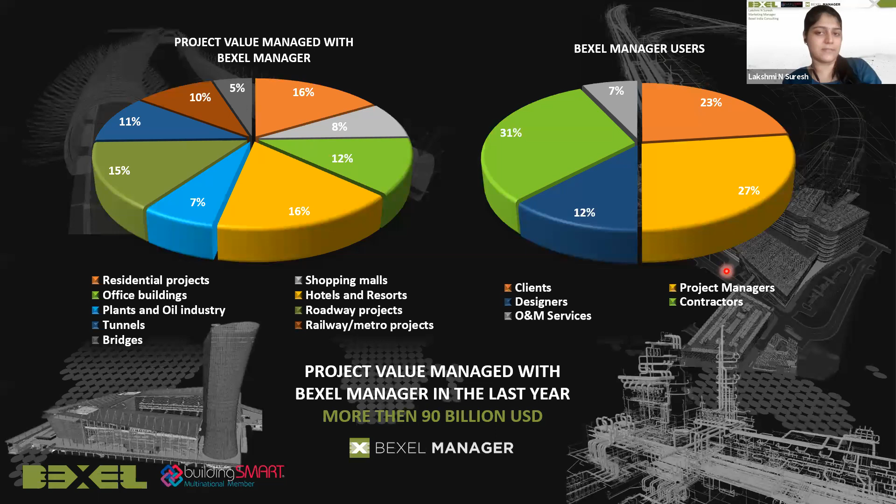So next slide. So there are various project values managed with Bexel Manager in the different sectors in the construction industry. The project value managed with Bexel Manager in the last year itself is more than 90 billion USD. So most of the Bexel Manager users are project managers and contractors. This is just a graphical representation of whom Bexel Manager serves and which industries we cater to, which is basically every industry.

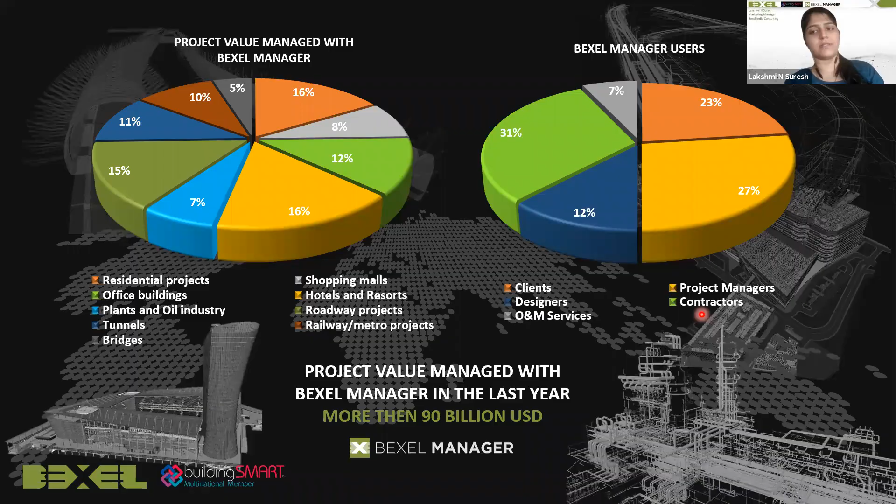So now the question comes, what is the requirement for them of any kind of open BIM standards, and how is it going to help the students? So this is the big question, right? Because you guys are going to be the next generation who's going to work in the disrupted and revolutionized AEC industry. So most of your faculties would also know there's a significant change happening in the industry right now. But the main question is, I'm talking a lot about BIM. So most of you would be thinking, what is BIM? But you might have heard about it also.

It's building information modeling, which is basically a process for creating and managing intelligent 3D models. For example, if you are making a smart city, it takes it from its infancy: how to plan, how to design, construct and operate in an effective manner, to how it looks in the future in a 3D manner before it is constructed. So our product Bexel Manager takes it a step ahead. So that is what we do.

So the current trends in the industry should be an important part of any AEC student's education. And it is crucial to become familiar with the software processes used in today's professional life. So it's going to help a student. It's basically higher chances of getting hired for internships and jobs. It's not only for our company or any other companies out there; the infrastructure and planning ministry is backing new trends in the construction industry. They made it possible for BIM to be used in most of the new metro rail projects.

So BIM is everywhere, but it's still in its youthful stage. But within 5 to 6 years, BIM is going to be a household name in the construction industry. So it helps you produce drawings more efficiently, allows you to access various visualization and analysis tools, easy collaboration in group work, clash detection, and less duplication of work. See, these are the things I can tell you.

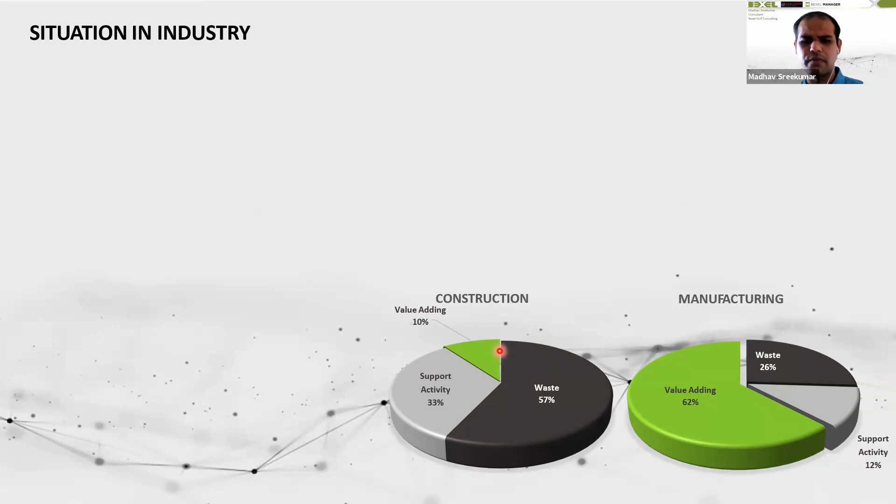There are things like lean construction management that look into taking the good qualities of the manufacturing industry and bringing them into the construction industry. So yeah, the manufacturing industry is always a well-established thing, but what about when we compare with other industries? This is a study by the Bureau of Economic Analysis.

It's US based, and when we compare our construction industry with four other sectors, we find that our industry productivity, the bottom red line, is almost a flat line with slight oscillations around the zero mark, and it has been in decline. Whereas in all other industries, even agriculture, with the implementation of technology, at least we see linear progress, if not somewhat exponential in the case of manufacturing.

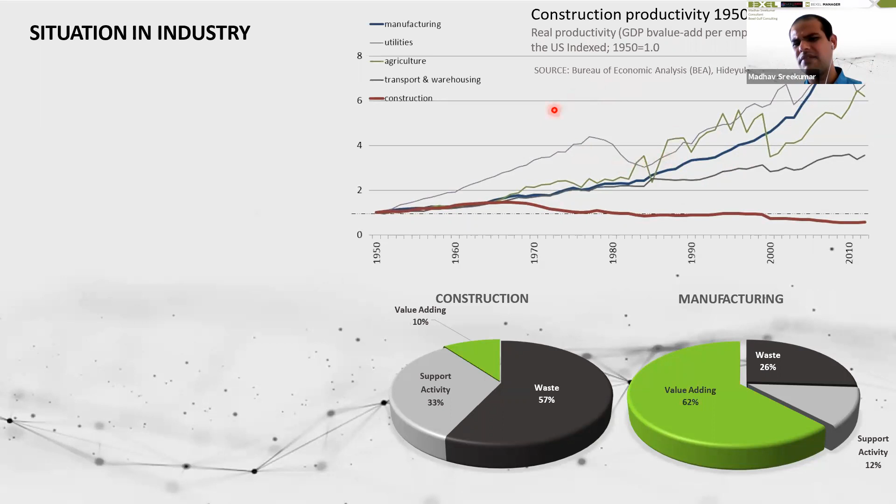The reasons for that are multitude. We cannot say that a single factor is governing the data, and even the data that we see over here is more qualitative, and there are still a lot of debates out there. But the situation, even in the most conservative estimate, is dire.

When we consider construction projects that are completed, about 72% are completed over budget, about 70% are completed behind schedule, and of those, 75% are at least 50% over budget. The point is that when we hit the number 70 or 75, you all would know it is three quarters. That is the struggle which our industry is going through.

And there is an analysis by McKinsey consultants that spans sectors from construction to healthcare. In between, we have banking, aeronautics, aviation, hospitality, different sectors. The least profitable industry is the construction industry. And why? Even though business is run primarily on profitability, in spite of such hurdles, construction is still a thriving industry because it is actually a basic necessity.

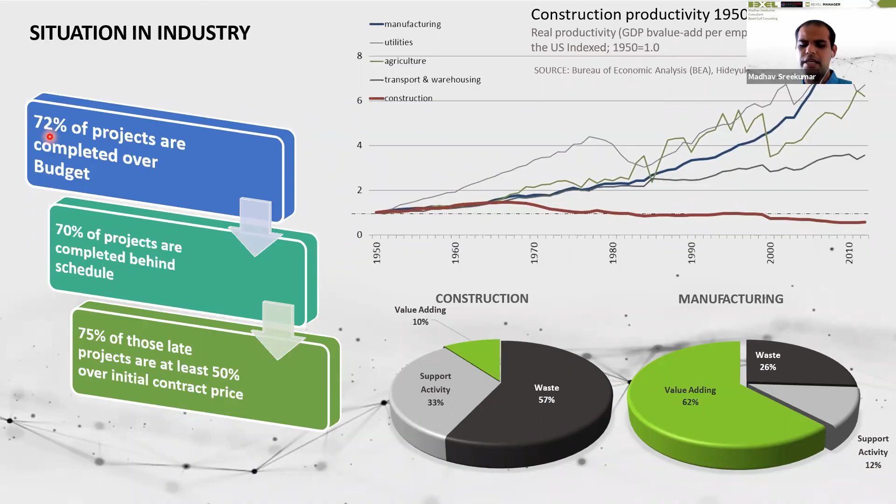However economical or uneconomical things tend to be, we have no other option but to keep the construction industry always on the move, calling for efforts to make things better. And one of those efforts led us to the direction Lakshmi was talking about: using the compounding effect of digital technology to integrate and better handle the data in our industry.

So before I move on to BIM, I want to show one particular case study. This is, of course, one of the most recognizable building projects ever developed. Anyone, even without a basic understanding of civil or architectural engineering, would identify the famous Sydney Opera House. And I have titled it as a project failure. Before jumping to conclusions, I'm talking about the Sydney Opera House construction project and how it is a failure in a strict project management sense.

I don't mean it is not a beautiful building, or that it hasn't created a lot of revenue. What I mean is that it was a project done close to five decades back, and the initial cost and final cost are very different, almost a 15 times factor in the actual cost of construction. Translating into the current scenario, if such a building cost about $1 billion to complete, I may be exaggerating, but think about it, and finally ended up at $15 billion, investors would run out. It would be a really messy situation.

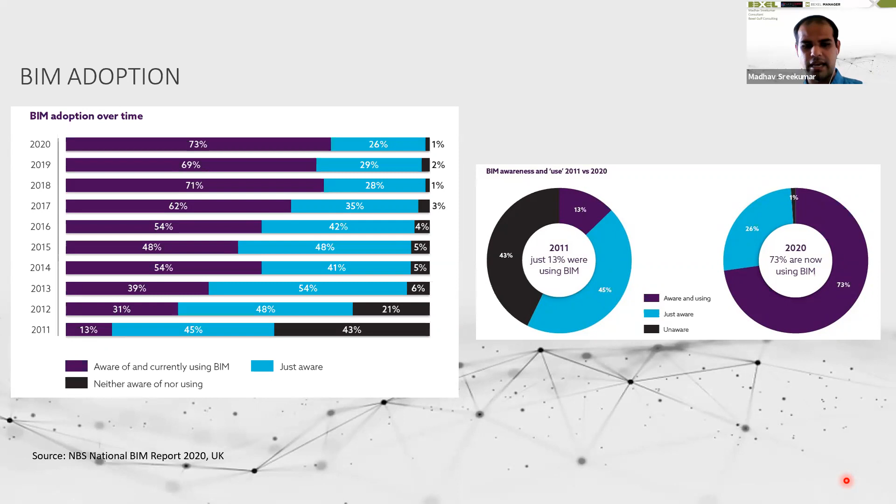Data-driven construction is currently being focused on by all, even the Indian government: the metros, the smart cities. In Maharashtra, for one project, I recently became aware that around 100 crore was set aside only for digitally handling the project management part. That is how big the situation is getting, and that easily translates to jobs for skilled people, and you can become the torchbearers of such progress.

Finally, we are essentially talking about how to tackle the inefficiencies. A key term, open BIM, becomes very essential. Why? Because we have data, and that data can be used by three separate software packages. The building life cycle is around 50 years. After 48 years, somebody comes to look at how to maintain the building, and he or she is restricted: you have this information, but you need to choose a particular software that is probably not ideal for the activities he or she wants to do.

It is kind of restrictive. The easiest analogy I like is that, just as a PDF is openable by any PDF reader, we need certain open formats of BIM, so that the data that is generated and created in a meaningful sense can be used throughout the life cycle of the building.

And considering that even the smallest individual house has a lifespan of more than 50 years, open data has become very important. These are some of the things that we need to be aware of as we come to a close. These are the broad guidelines that everyone needs to set in mind before we delve into the specifics of BIM and the specifics of Bexel Manager.

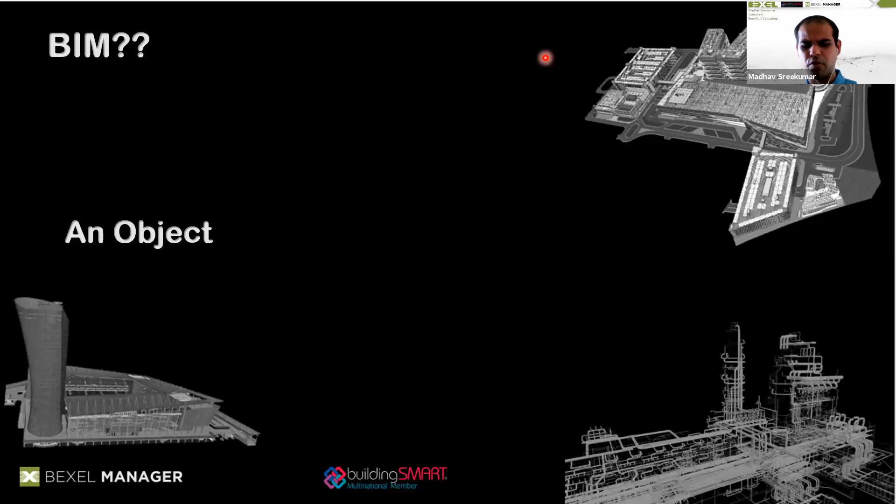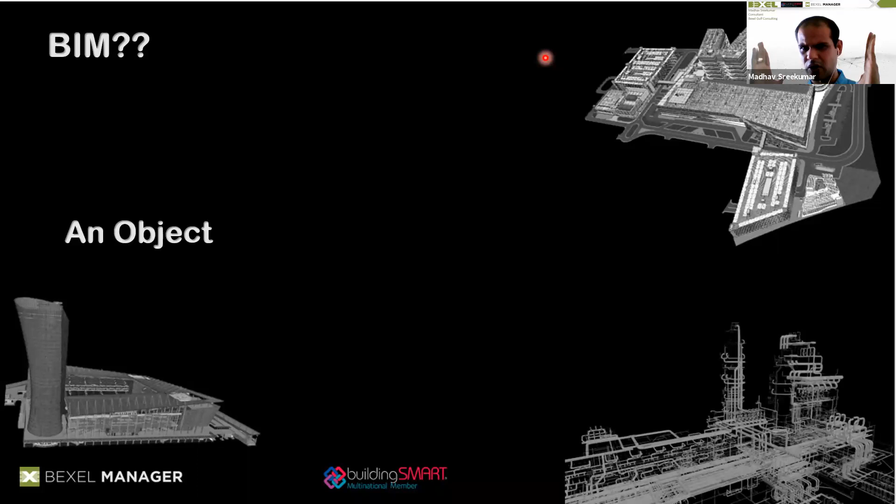So in BIM, we have something called an object. Imagine a building; any component of that building can be described as an object. So a door or a beam is an object, and you can list more, I am sure. Essentially, when you're trying to draw a 2D CAD drawing, when you're trying to translate some thought process onto paper, you are trying to define this object. And in BIM, we are trying to digitally represent this object and manage the information that we are representing with this object.

And 2D CAD that we draw, either using a CAD authoring tool or even pencil and paper, essentially does the same thing, but it has various levels attached to it. Okay, and the information that we spoke about here can be classified into two types. Any object will have geometric information and functional information attached to it. So again, we tried to make things simple and ended up with object, geometric and functional info. So let's look at what exactly geometrical information is.

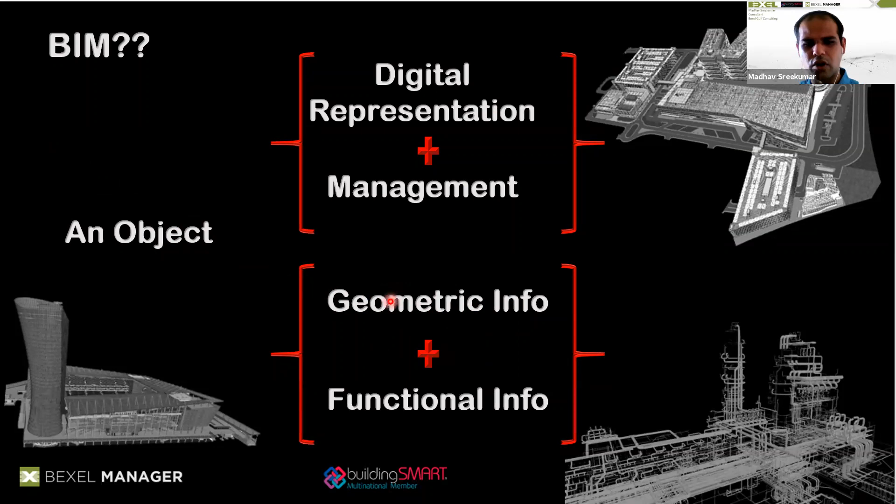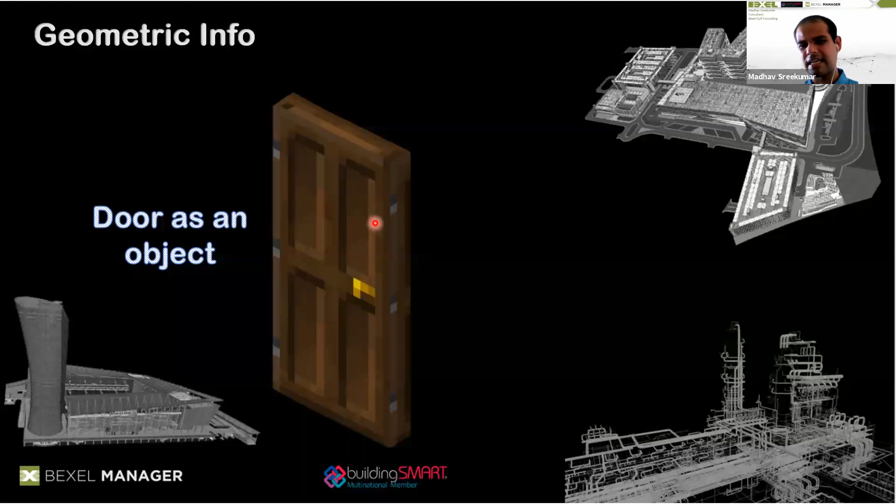For that purpose, I'm using the simple door that we use in our buildings as a reference object. So what are the geometrical informations attached to this object? A door definitely has a height, width, thickness, and a swing. And all these things, if you take one second to imagine the 2D drawings that you have produced, are captured in the 2D drawings in plan and section.

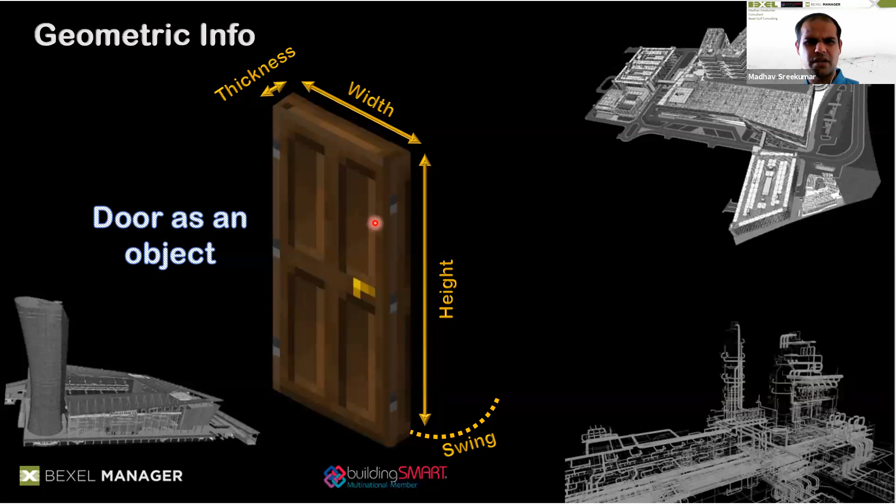And is this enough? This level of information, is it enough for a person at the construction site to completely build this particular object, that is, the door? Is there any other information related to this door that a person would need? That question leads us to the next type of information associated with the object, that is, the functional information.

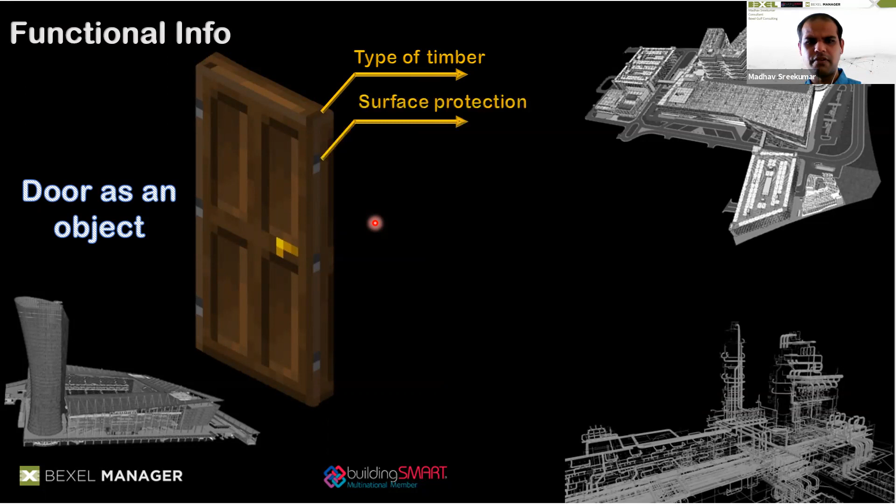For a door, some examples, not exhaustive, would be: what material is the door made of? Is it timber or steel? What is the surface protection, like varnish or paint or bitumen coating? What exactly is the fire rating that is needed? What is the make of the door handle, or do we need a specification? It needs to have a certain level of security, a twin cylinder, some particular locking mechanism. That kind of thing.

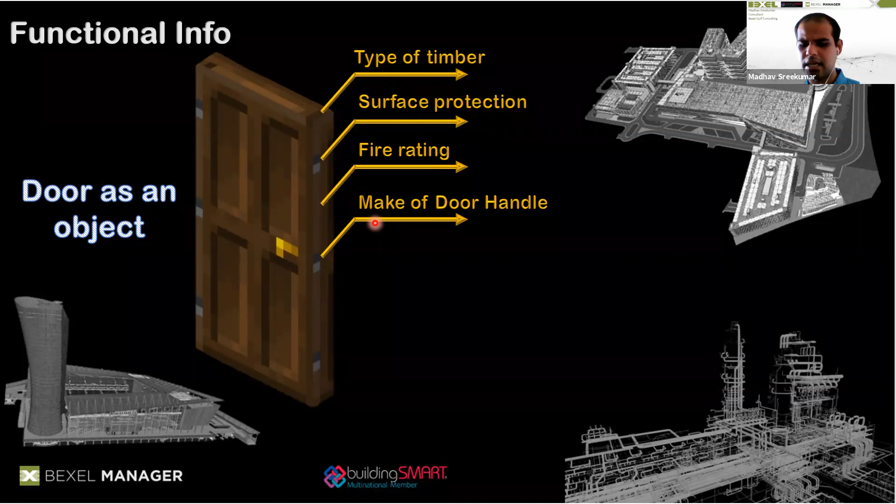The material cost is actually needed. When the client asks how much money they would end up paying, we as consultants or contractors would need to have an answer with minimum variation involved. And the labor requirements: what exactly is the number of people required? Is there a particular kind of tool required to handle and install this door at site? All those things need to be looked into.

And finally, imagine that the door is constructed at site. As I said, the door is probably going to be used for a lifespan of 50 years. What is the maintenance cycle? Do we need to revisit every 2 years or 10 years to check whether the quality is good?

What exactly is the maintenance that needs to be done, or quality checks that need to be carried out? So you see, all these functional informations are also attached to the same object, and with BIM we are making sure that the geometric and functional information is coming together in a meaningful manner that can be used across the life cycle of the product.

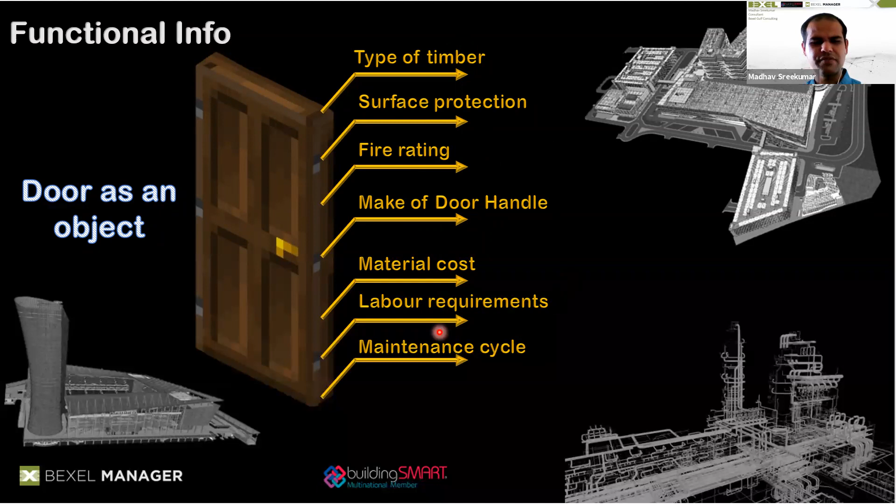So that last part, across the life cycle of the product, let's look into the information that we saw previously. In the previous slide, we saw around 7 functional infos. Are all these informations made at one single go? Probably no. The answer is no. And to understand that, let's look at these 7 functional informations from the life cycle of a project perspective.

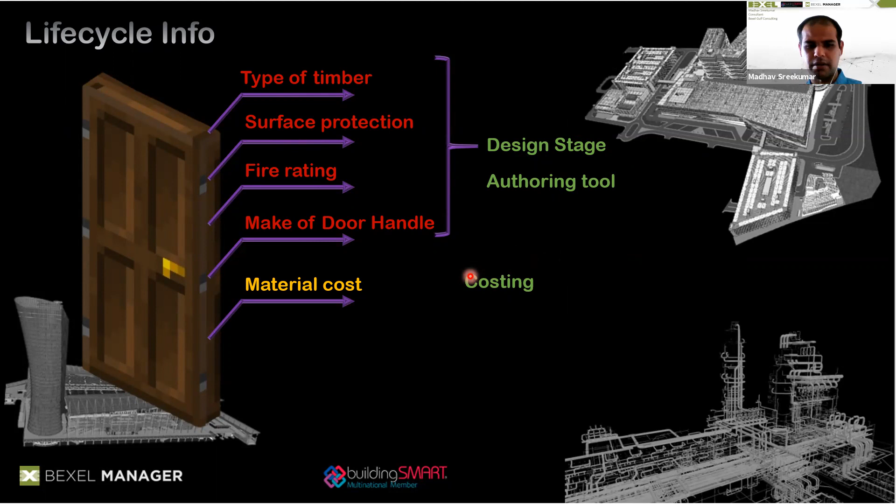And these 4 information, if you can see, the timber, the surface protection, all would probably be decided at the design stage by an architect. The material cost would be carried out by a costing consultant, but that's a separate person and a separate part of the life cycle that material cost comes into play. When we come into the labor requirements or the time involved or all the sequencing activities, a planning engineer would be involved for this same door. And when we talk about the maintenance cycle, it's clearly a post-construction activity.

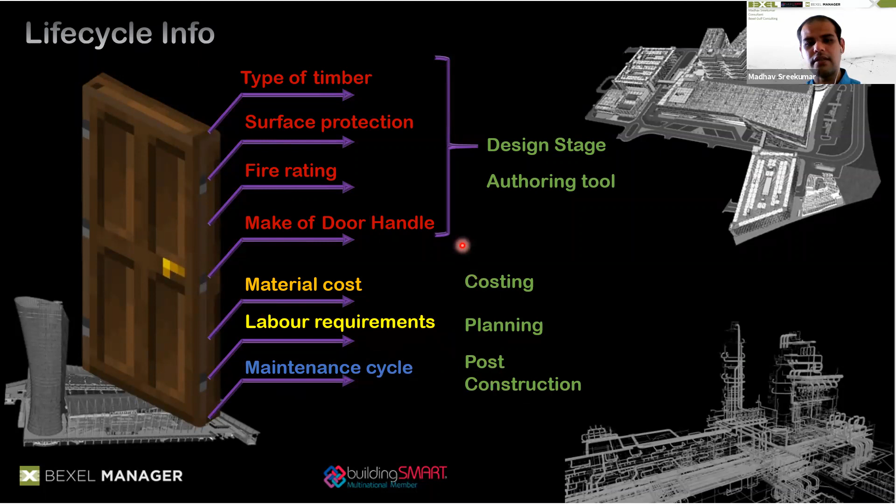So even within this information, you see that many information is added at later stages at different points in the life cycle of the project. And that's where we come in. We as Bexel Manager want to have a proper integrated software platform where all the BIM management cutting across all the life cycles can be managed. And hence, when we talk about Bexel Manager, we add one more word before the BIM management tool, that is the word integrated. And that word we will keep on repeating throughout this webinar.

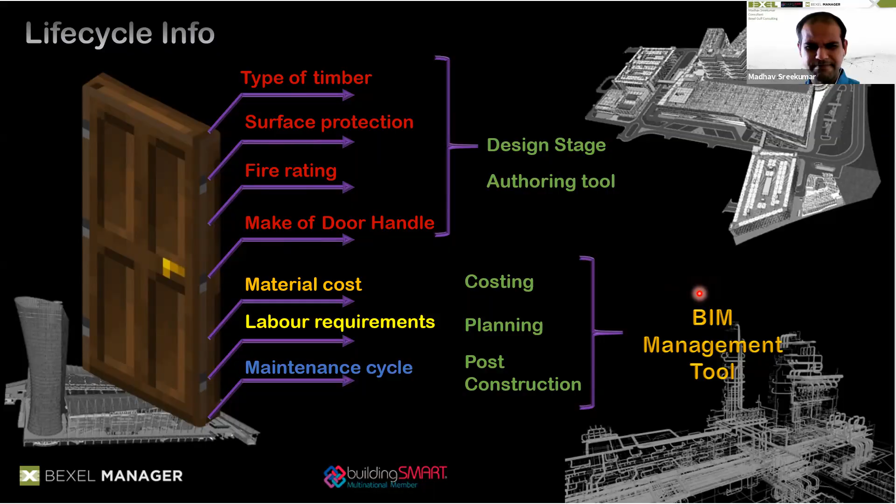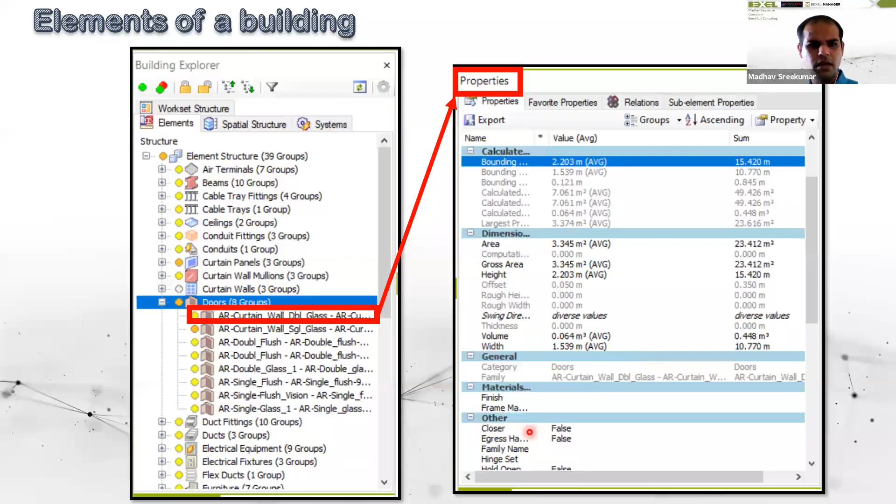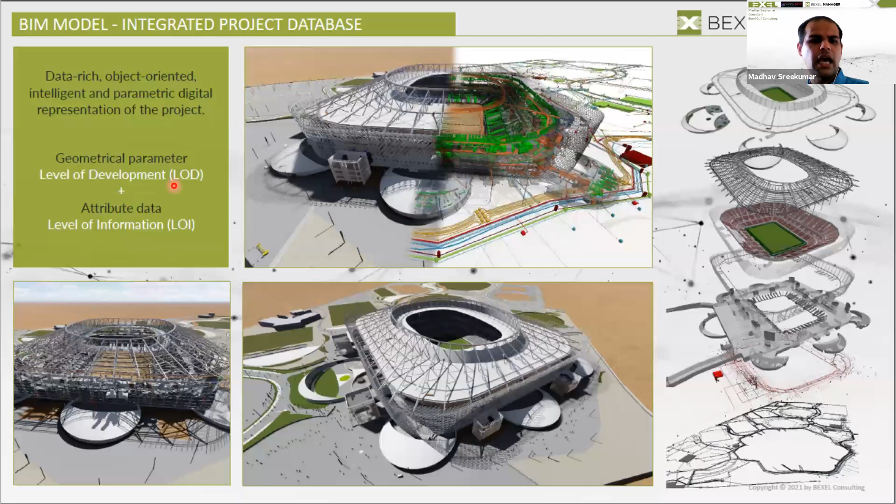So imagine this, for those who have studied structural engineering, you would be setting, okay, the load can be taken, a minimum standard or minimum strength is set, or minimum requirement is set. Something similar is set with the level of development and the level of information. We are at the start of the project saying that when you are developing the information, we need so much of the information in such a manner. So this is an initial expectation of how the project should take shape, and these together bring out the complete BIM model.

Yeah, and when we're talking about BIM, another concept or term that we commonly see is the federated BIM model, and that is nothing but you have different teams working. When we are strictly in the design sense of a building or an infrastructure, we have different teams working together to build this building. For example, the structural team would be responsible for developing the structural elements. The architectural team would be responsible for the facade and all the spaces aspect of the same building.

And the MEP team, the mechanical, electrical, and plumbing team, would be responsible for developing models related to the same building. And all these three separate teams' information should fit together to form one single model that can be taken apart, put together, and dissected to create meaningful information. So that single source of information, using different information from different teams, when it comes together, is called a federated model in BIM. So try remembering this term when we are continuing with the discussion about BIM.

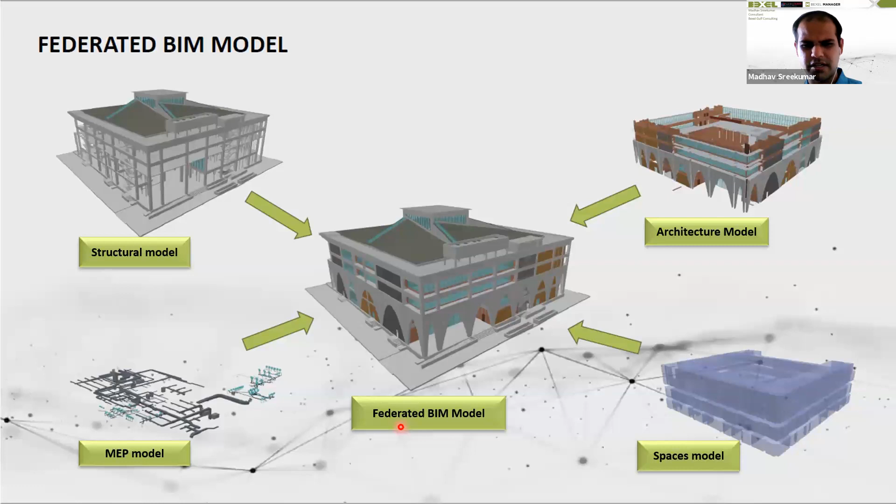And this sums up a talk about what exactly BIM is. So to recap, until now we have talked about why BIM is required and what BIM is. Now let's see how Bexel Manager is very efficient, and why we keep getting recognition in the BIM software platform because of our integrated BIM management tool. So that is the section we are starting on from now onwards.

One of the advantages of Bexel Manager, why we are very robust in the automation aspect of things, is that we have the ability to create different templates. The exact meaning of these terms would be irrelevant at this stage of understanding. What templates mean is that, for example, I own a construction firm that builds private villas or individual townhouses. So the kind of construction that I carry out is very similar. Shifting from one project to another, the kind of information that I would be handling is also very similar. So once I set up for one project, a lot of things can be reused.

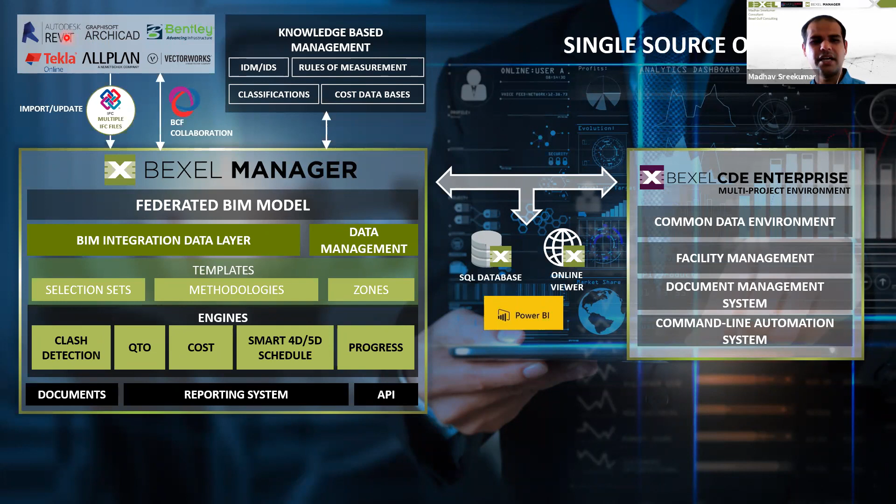That's not just it. When you start working on the BIM processes, you will see a plethora of softwares that are available, starting with the most famous, Autodesk Revit, and Bentley, Tekla are all the major players of the different segments of the BIM processes.

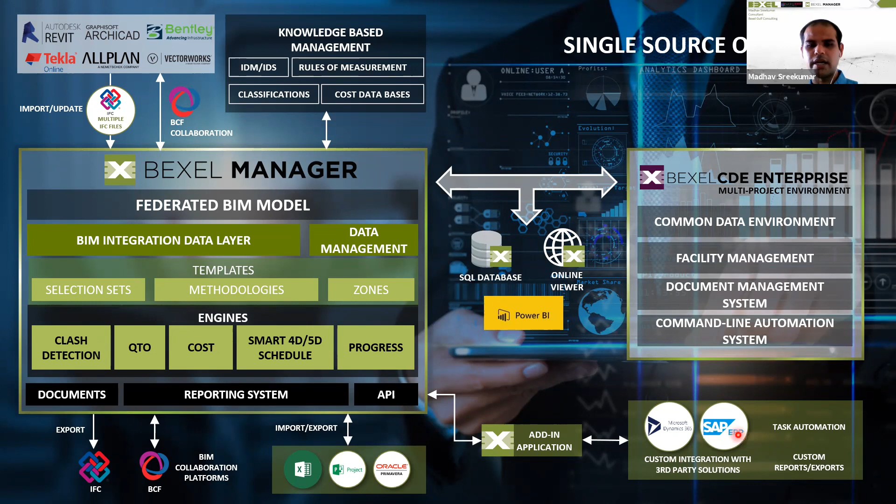And all the information we spoke about till now is BIM, and we are operating in a construction industry that is severely non-BIM, and hence the need for us to communicate, export, and import data from non-BIM softwares like Oracle Primavera, MS Project, and Excel, which we are also able to handle very robustly. And finally, customization for client requirements is also another thing that Bexel Manager is able to handle. For example, SAP ERP kind of customization, if required, can be handled using add-ins.

Now coming to the BIM lifecycle, we say that Bexel Manager has visibility or capability to handle information in all the BIM lifecycles of the project. So the different BIM lifecycles are 3D BIM, which involves clash detection, visualization, and quantity takeoff. When coming to integrated 4D, what we mean by integrated approach here specifically is that we have two things, time and cost. So costing comes in the BOQ or the costing line items, and the schedule comes in the time part. And one is dependent on the other.

So the costing person who decides that instead of one resource, he will implement 5 resources to handle the same task, it will have a direct impact on the schedule. And similarly, the schedule person who decides that instead of 5 days, he will be stretching this activity to 10 days, will have an impact on the cost. Hence, the importance of integrated BIM. And here, we get to communicate between the cost and time aspects, track the progress, check the planned versus actual analysis, and finally the reporting.

And that's not just it. Till here, let's say, is the finishing of the activities. Once all the construction activities end, then facility management and all other things come into play, and that is handled by our CDE environment. And these two aspects, 3D and 4D BIM, would be the primary focus of what we are discussing here today.

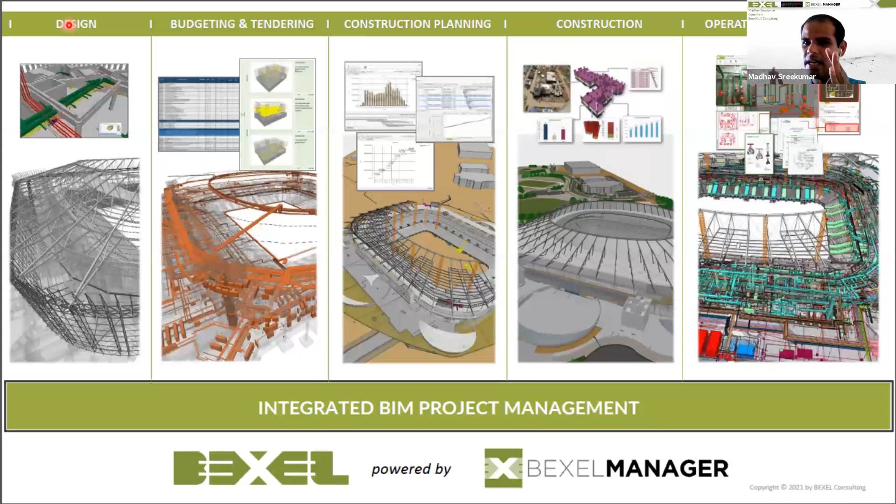So I keep talking about 3D BIM, 4D BIM, 5D BIM, 6D BIM, but all in the construction industry are very familiar with some other terms. In the project management sense, we do not use the term 3D BIM. We use something like design, budgeting and tendering. We use construction planning, construction, and operation and maintenance. And when we are doing the same processes using BIM, we use the terms 3D BIM, 4D BIM, 5D BIM, and 6D BIM. So it's not complementary things. It's the same process having two different names because of two different approaches.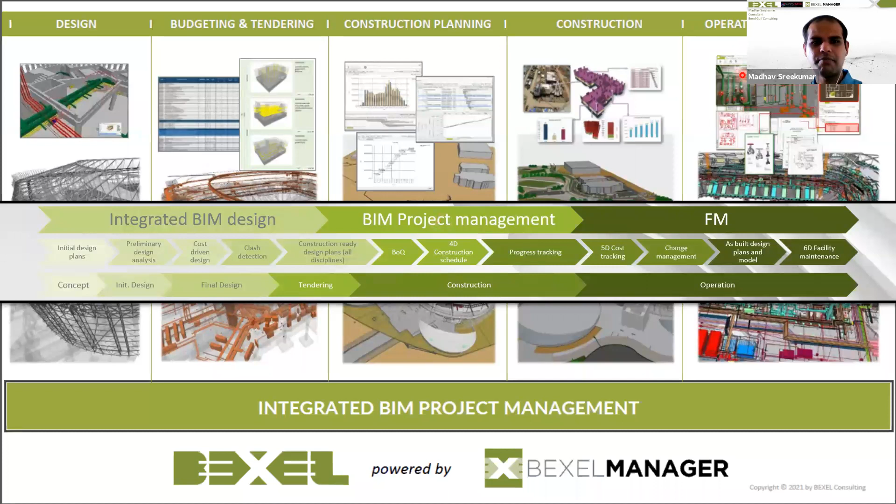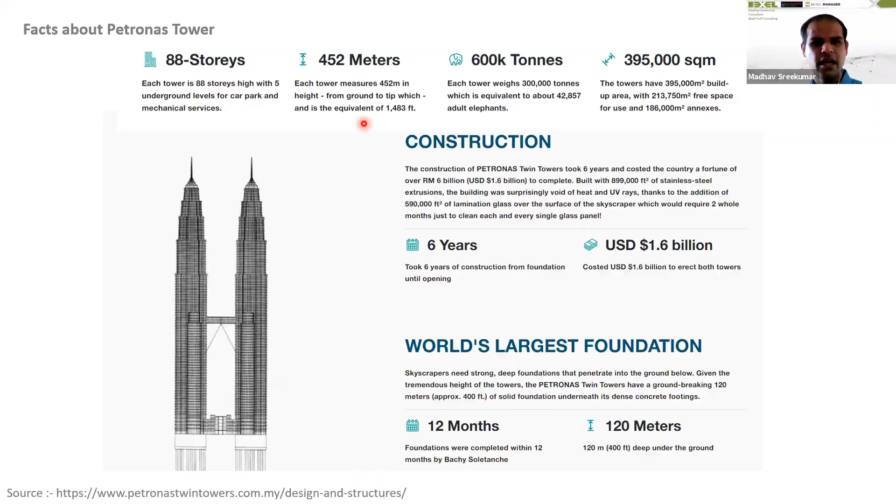And a quick break from Bexel Manager to see some brilliant construction. The Petronas Tower is what I would like you guys to keep in the back of your mind when we are talking about the complexity of the construction, the complexity of the information. Around 1.6 billion USD was shelled into building this project, and it has 88 stories, and the kind of information that needs to be handled is very high and busy. And using our Bexel Manager, we have something called steps of progress, or what we call a workflow.

We start with the input. As I said earlier, we have something called the 3D BIM data, generated in an authoring tool such as Revit, as the input for us. We start with the geometry. We get an input. What do we do first? We see whether it is like we wanted it. We check whether there is any error. We do all the verifications, and we finally either make some changes, or we say that the quality check is good enough, we can go for the next step.

For the next step, we start with creating and fine tuning of the cost. Then there is something called cost version, which is essentially a budget. And from there, we have methodology and zones for creating an automated smart planning schedule. Automated schedule creation is the final step. The intermediate steps will not be intuitively clear to you, so I will be explaining all the intermediate steps in detail.

So what should be clear at this stage is that we have something called input, and we would be verifying it and checking the quality of that information using Bexel Manager, and finally ending up with automated scheduling that utilizes the efficiency of our software.

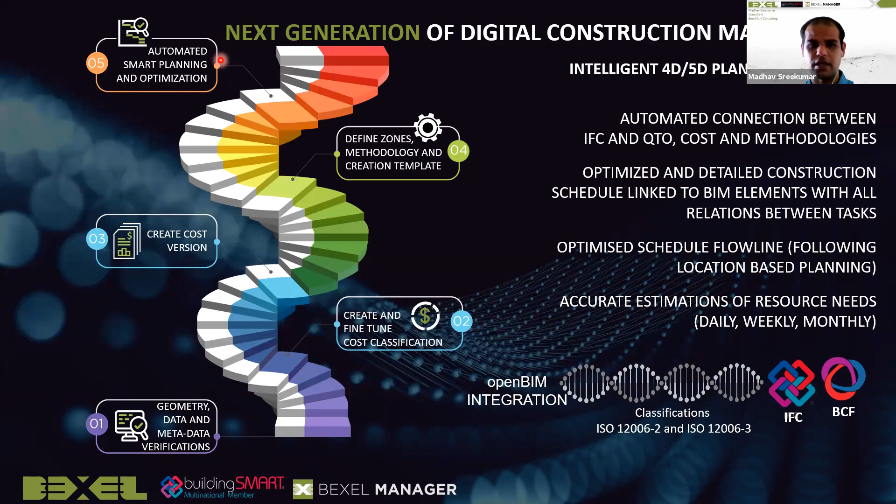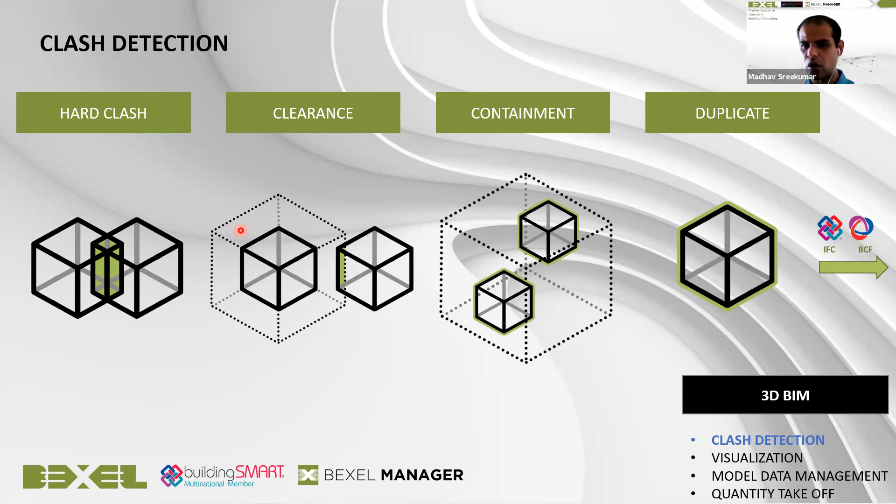So if the clearance between the beam and the duct is less than 50 mm, that would be a construction clash, and tackling it at site would be difficult. Using our software, we run checks on the rule we set, the 50 mm clearance between two specific elements, and check whether this rule is violated anywhere in the project. We understand violations of rules in this manner, and we solve them before we start constructing. That translates to a lot of financial saving.

It's studied that one conflict at a construction site is equivalent to a large amount of money. On a $1 billion project, 75,000 rupees might not be a big deal. But at site we are usually dealing with thousands of clashes, so this value gets multiplied, and hence clash detection and ensuring the quality of the product becomes important.

These are some of the clashes we have detected in projects using our software. Here, this red element is a beam, and the green duct passing through it is a clear clash, which we can ask to be resolved at different stages. Similarly, a few other clashes are represented here. So basically, clash detection represents geometric information validation.

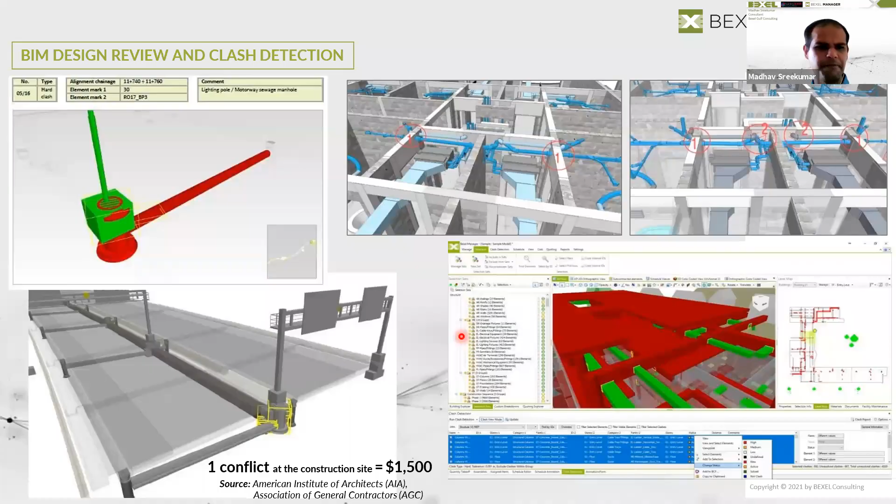Let's say we found all these clashes and made sure they are resolved. We are now sure that the geometric information in the BIM models is correct, the quality is passable, and we can start constructing on site. But BIM has two components: not just the geometric, the functional information is also there, which we handle by data validation. For data validation, again, the input is the BIM model. Our technical team has pre-developed many API scripts that are customizable to our requirements, and these scripts essentially set a checklist, for example, that a beam should have certain information.

And basically, once we run this input through this script, we get that, okay, it is possible. It has got so many warnings. It has got so many errors that need critical resolving, and things like that are generated. Essentially, the functional information quality check is handled using our data validation.

Now, say we have validated and found that 10 errors are there. We have also developed scripts that are again customizable to enrich our model and make sure that the errors that are coming in the data function can be addressed, and not just the geometric information, the functional information is also at the level which can make meaningful sense on the construction site.

So this is what we talk about. We have the geometric information, we have the functional information, and how the quality checks are done for both of these is essentially what these topics of data enrichment deal with. So essentially, when we are saying we are done with the data enrichment, we are saying that, okay, the quality check is all done. Now we get to use the information input, and we can start managing it.

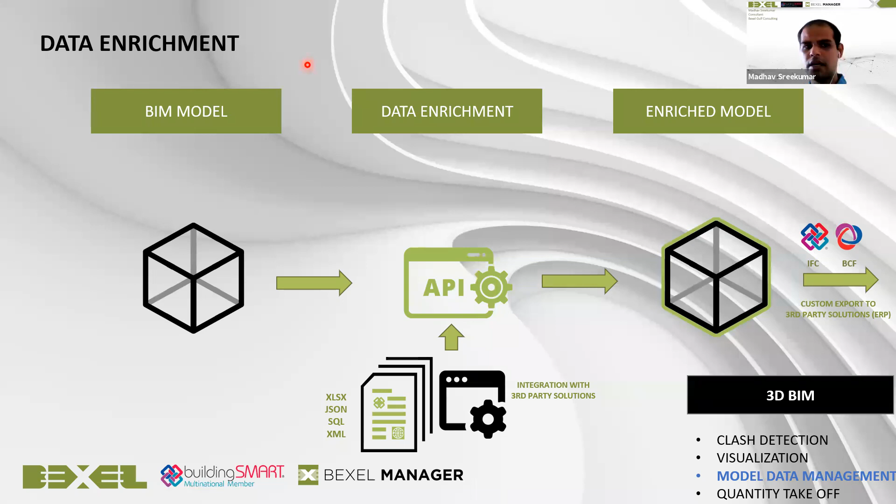The first thing that we would do is a quantity takeoff. Anyone who has done the basic paper on quantity and estimation, it's basically a manual calculation of the volume and/or a surface area or something else. You need to calculate for each and every component of the building, and what we say is that it is actually reinventing the wheel or repetition of information. We already have got a 3D model. We are wasting our time and energy if we have to recalculate the information.

So instead of manually calculating the quantities, what we do is that within this breakdown, we say that of all the elements, around 10,000 elements available in the particular project, I want those elements to be categorized based on some formula, category and family. These are terms that are very commonly used. And of that, I want the quantities, the volume, the area, length, reinforcement, all these things that are already associated with the 3D model.

I want that information presented, and this is exactly something that used to take months for a complicated project. We are able to define it very easily using this logic. And this is actually a very good value addition to the way we function. And when we are talking about creating alternate workflows to make things more efficient, this is exactly what we talk about. So another key area that we can handle at the 3D BIM level is quantity takeoff.

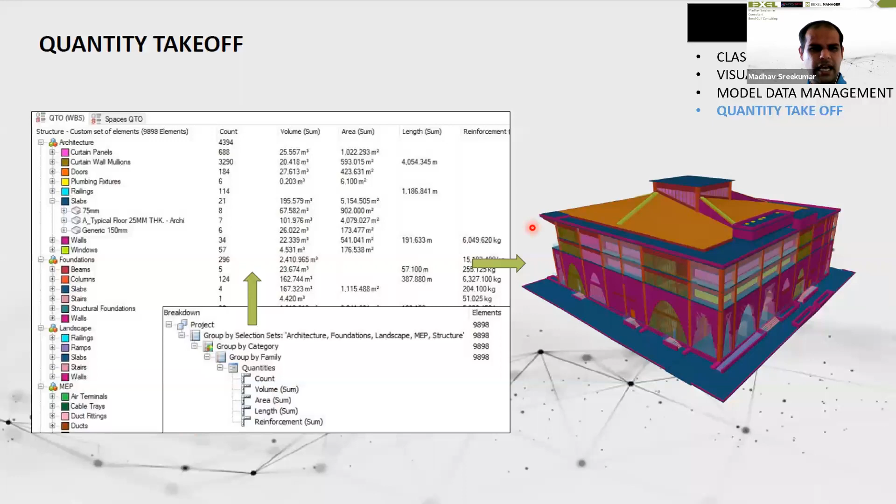And now we are starting with something else, like the cost management. And so we have the quality check done, we have the values done. Now we have the cost management system, which can be done in two manners. One is this starting point. Another is the alternate starting point I am trying to show. What exactly is it? Let's look at it in a deeper manner.

So the first starting point is, in the previous slide we talked about quantity takeoff, right? The quantity takeoff that we have created, we can use this and automatically create cost classifications. So we have the quantity, what is the cost attached to it? So based on that we can automatically create, and we can use our expertise to fine tune this cost to create meaningful cost versions. So over here we already have a cost version which can be translated to integrated cost data. So this is one process.

Another process is we have got many international standards available, like Uniformat, Master Format, or DIN. DIN is based on German construction practices. Uniformat or Master Format is used for Canadian, and so different countries have got different standardized practices, and using such standardized practices, we can get them into our Bexel Manager, either through API scripts or using Excel spreadsheets, and finally fine tune such inputs to create an integrated model of cost data.

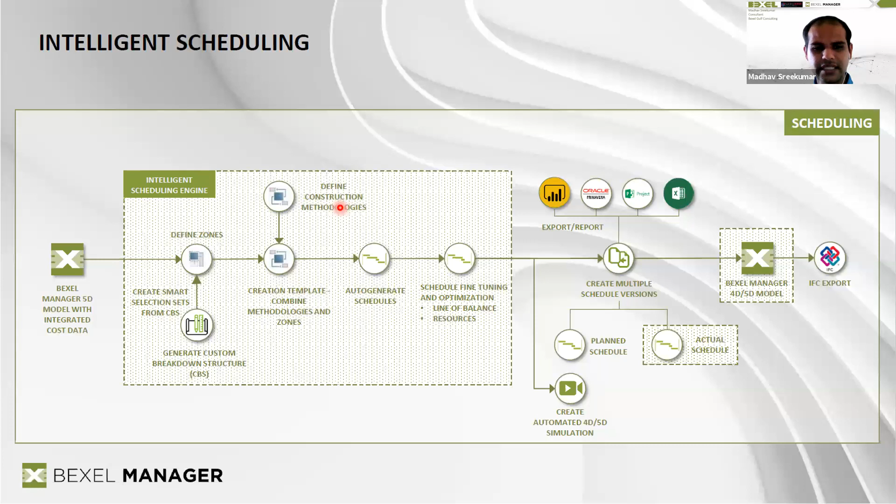So I want everyone's attention on two aspects, two words: define zone and define construction methodology. If we understand these two things, we will understand how Bexel Manager is able to create an intelligent schedule. So first is zone, second is methodology. Zone is a spatial representation or spatial organization of the project. For example, a building that has 11 stories, with first story, second story, third story, fourth story, is a spatial arrangement of data.

And when we describe a zone as second coming after first, third coming after second, the Bexel Manager software will understand that this is the way in which the vertical information is stacked, and we will avoid the error of 5 coming after 6, or some error can be handled in this manner.

Another spatial information is the horizontal one, like the buildings being constructed in phases, phase 1, phase 2, phase 3. Another way is building 1 and building 2, like we have two buildings. After completion of building 1, construction works on building 2 need to start. So such precedence in the horizontal information of project organization is handled using the term zones.

Then we talk about methodology, or what we mean is the work sequence definition. So what is a work sequence? In this building, we can say that first it would be the piles, then comes the pile cap, then there will be the slab, then the tie beams associated with the pile cap, and then we have the columns, walls, and that's how one particular work sequence goes on.

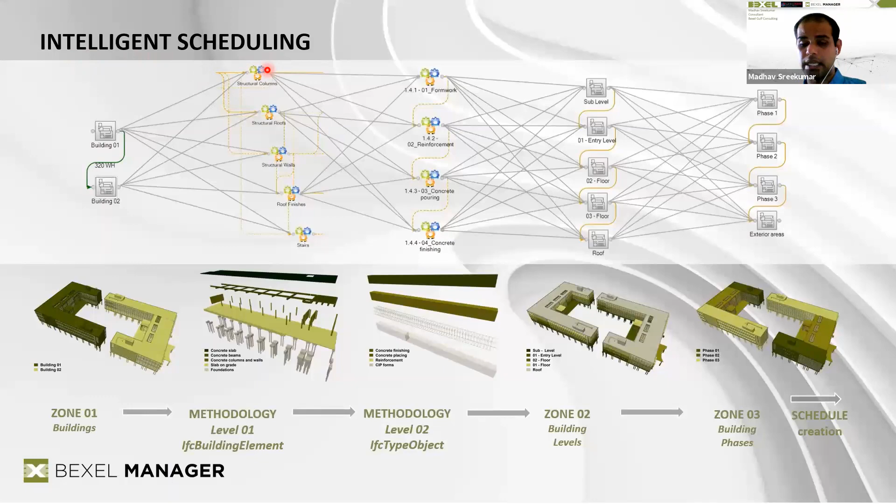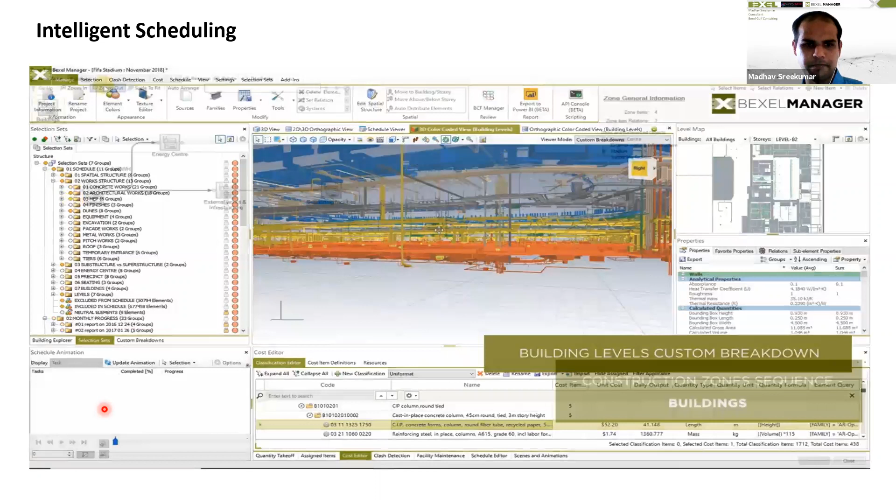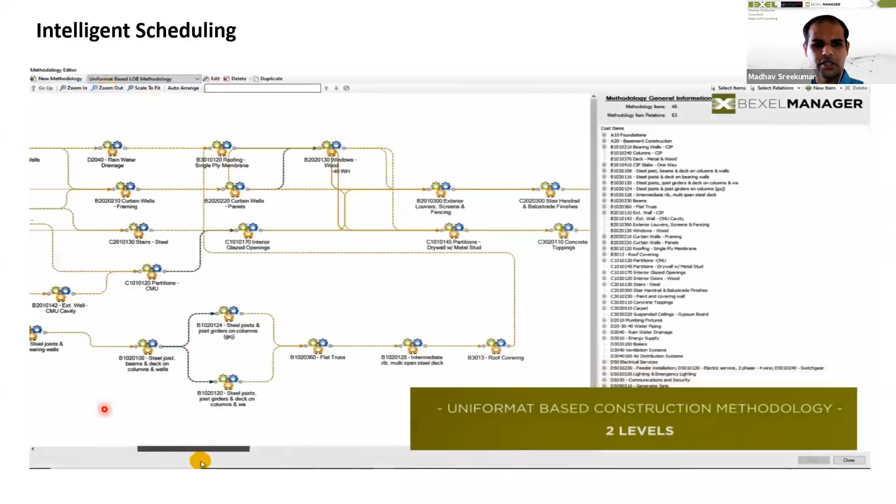So this is a video that I would like to share at this moment about how the intelligent scheduling is implemented. All the theory that I talked about until now, how is it actually happening at the software level. So these are the zones, that is the spatial information that we are creating. This is the methodology that we are creating, that is the workflow of information. And finally, intersecting both is this particular aspect, the auto generation of the construction schedule. It's a wonderful process.

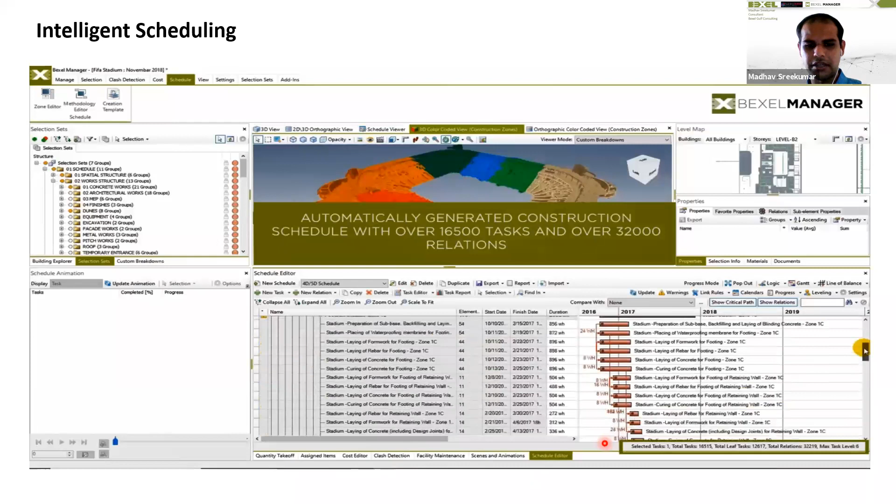My major experience is from a structural engineering background. For me also, it was very intuitive and easy; within 2 days I was able to generate very detailed schedules. Our software essentially removes a lot of entry barriers, and with maybe 5 days of very focused attention, a person can very intelligently use our software to create meaningful information.

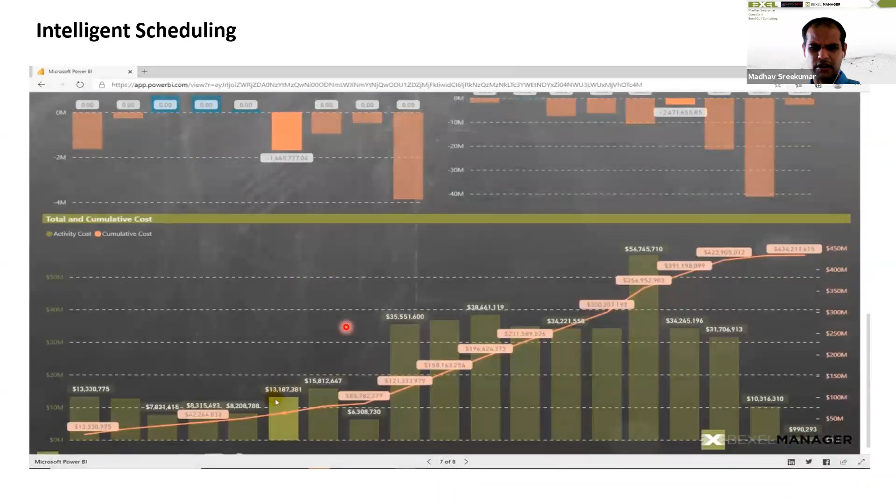And one of the byproducts of all the rules that we set is that we are able to generate automatic construction scheduling videos and generate a lot of Power BI templates where we compare the cost, the earned value, all the graphs, and all the information that needs to be handled. For example, the cost performance index, and bringing all that information together in one sheet is doable. So this is the complete workflow in 2 seconds.

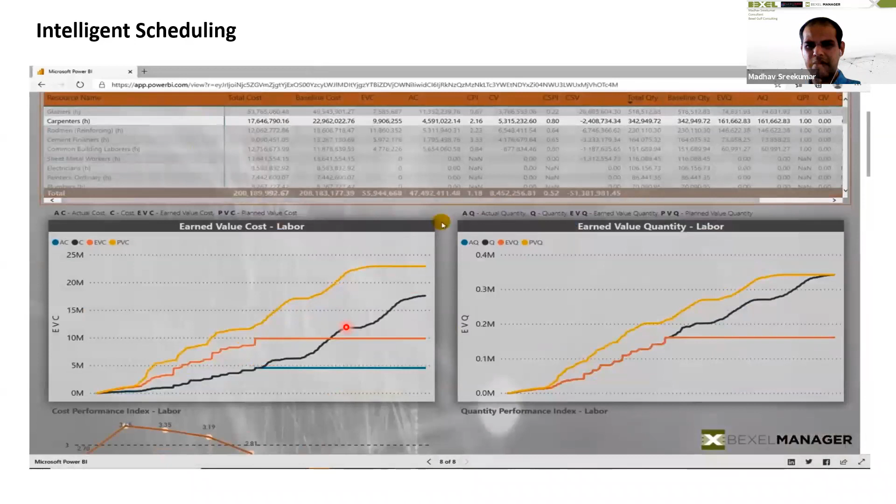So it is not as difficult as it looks, and it's not as easy as it looks. That's my take on it. Right?

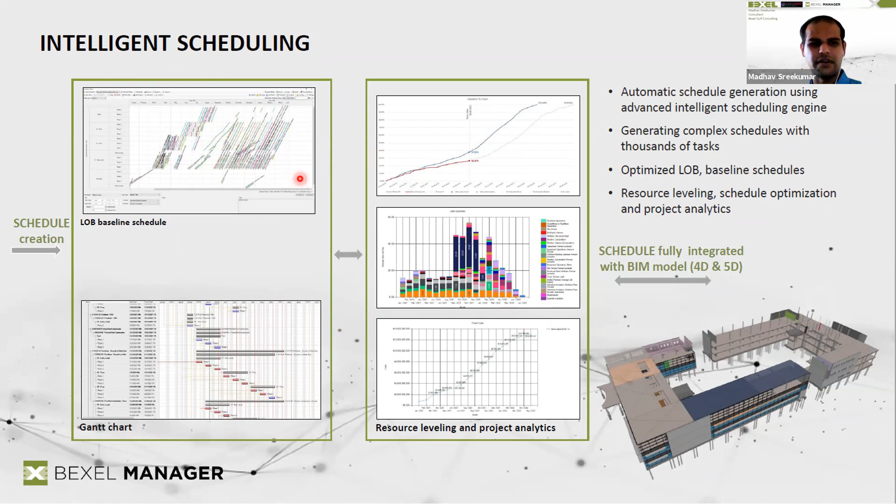So that's one video. We have a few more videos so that you understand how whatever I'm talking about theoretically gets practically reflected in our software. So this is some of the information that can be churned based on the rules that we set. This is another example of the information. This is actually a scenario analysis.

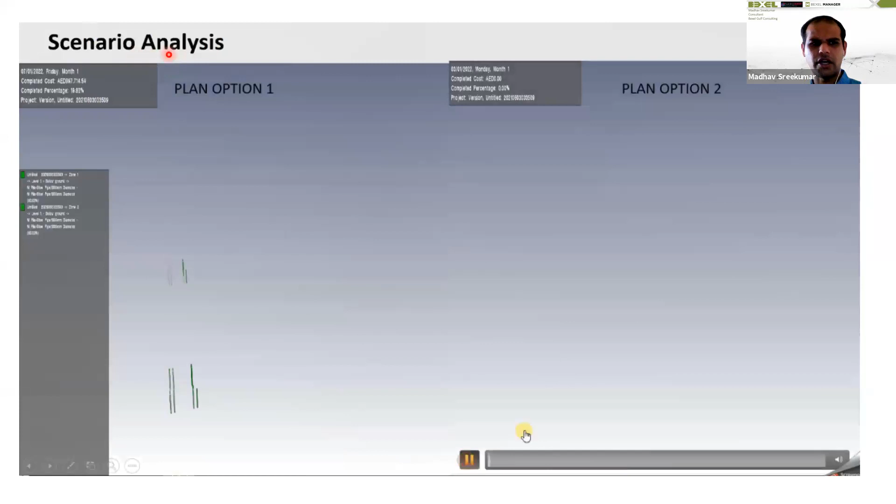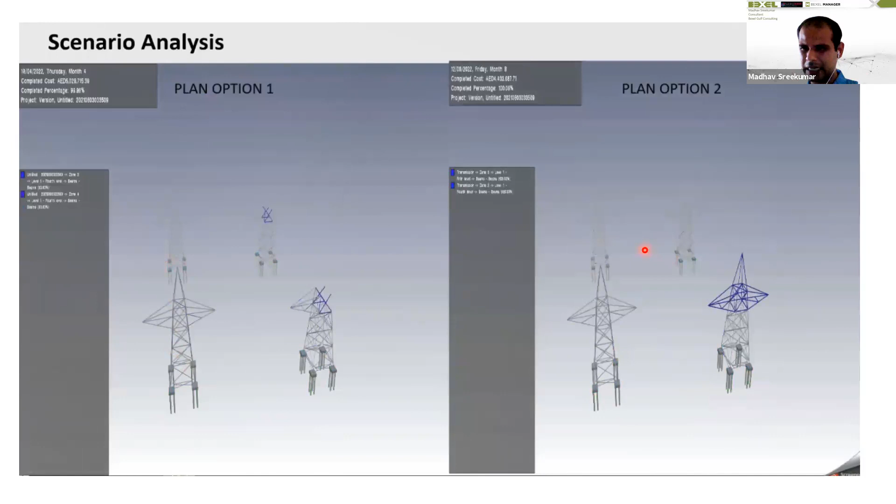We have two types of plans, option 1 and option 2, for a transmission tower. In option 1, we are constructing 2 towers at a time. In option 2, we are constructing 1 at a time. So what exactly is the advantage in terms of cost and time, we are fairly understanding. And n number of scenarios can be easily handled, and better and more efficient decisions can be taken. For example, in civil engineering, decisions like, let's not waste more time, let's go with this kind of blanket approach, is not the most optimized way of doing things.

Here we understand that option 1 takes about 4 months to complete, and option 2 is 8 months. So when we go to the client and say, do you take precedence of time over money or money over time, such scenarios can be very easily understood.

Finally, we have the cost and the schedule, indicating how it needs to be constructed at site. And once the construction begins, is the construction sticking to the schedule? Is there a delay? Are there ahead-of-time activities? All that progress tracking is very comfortably handled using our inbuilt packages. And here you see that we get to customize according to our requirement, with minor changes to the already available API scripts.

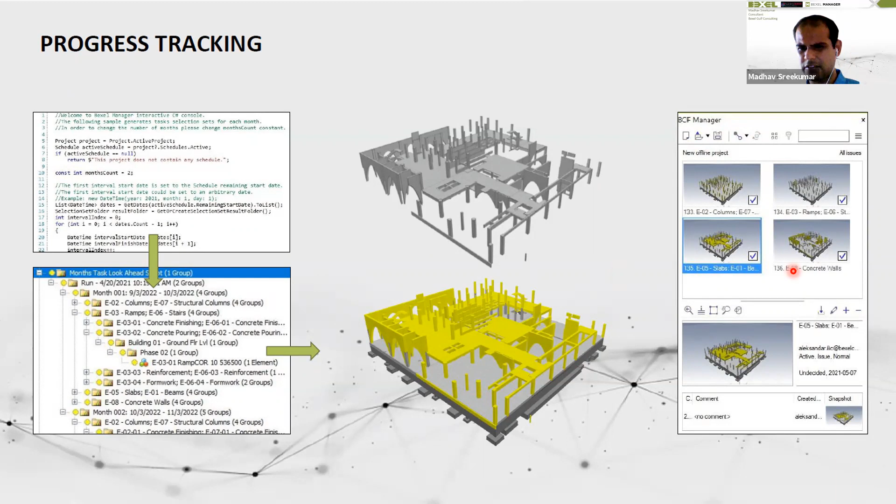And this you can see is a monthly task look ahead. So for example, this particular month is from this time to this time, and these are the activities that need to be completed. And here you see BCF, the BIM collaboration format. Here we get to communicate with the site engineer saying, okay, this month, this many activities need to be completed. How many did you complete? He can review, send us back the information, and we get to update and track the progress using our software.

Again, this is the scenario analysis. I said it will have cost impact and time impact. So plan 2 is taking more time but less cost. Then it's an executive call to say, okay, the cost is comparable, let's go with plan 1. Or, I need to save whatever small margin of cost, and since it's not a critical or time-dependent activity, let's go for plan 2.

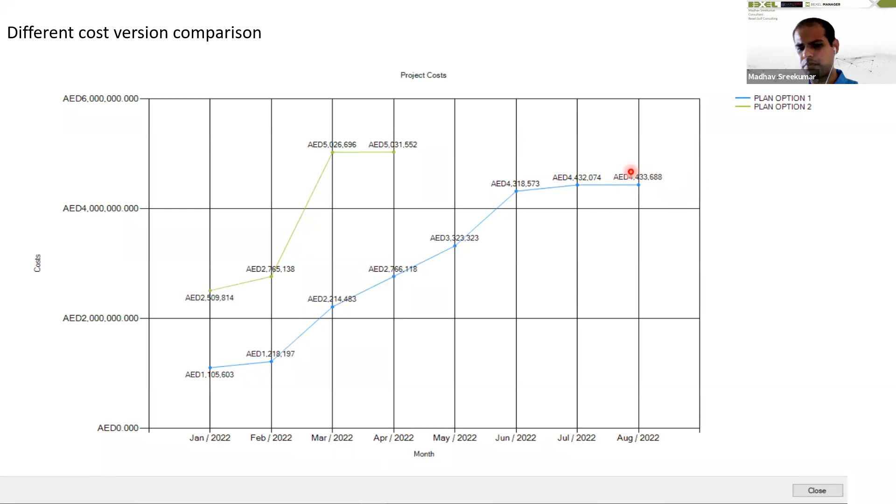Such kind of decisions can be generated using our software. And finally, these are some of the reporting and analysis. Like, imagine, recall to your brains the Petronas Towers. We have got 88 stories. We have got probably a 50,000 line item schedule, a Gantt chart of that scale, which no one can comprehend in a single manner, however expert he is.

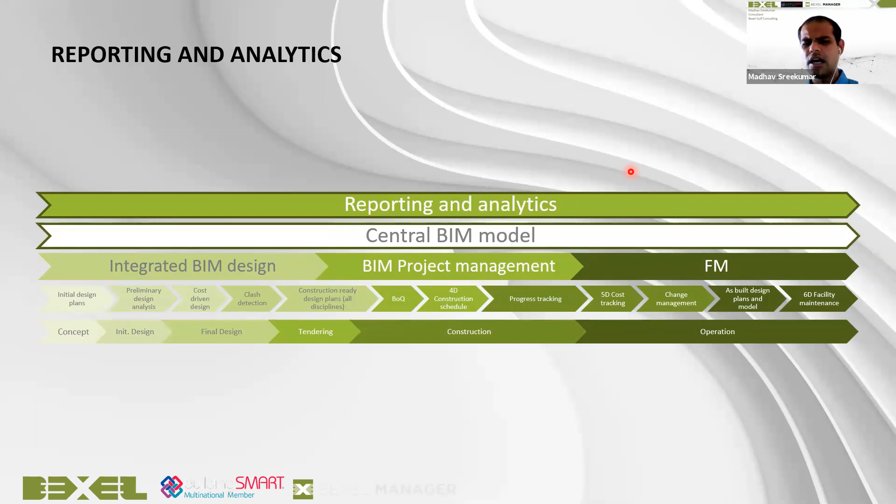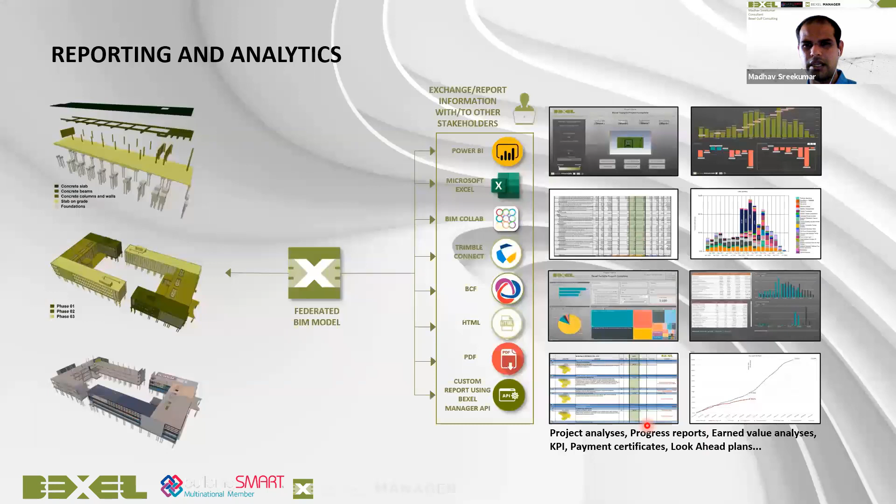So getting the meaningful information that can be handled to generate quick decisions is what we try to implement. And things like Power BI, Microsoft Excel, and all these other formats are ways in which we generate the information that is created in our federated models. And this is something that we are very robustly able to handle.

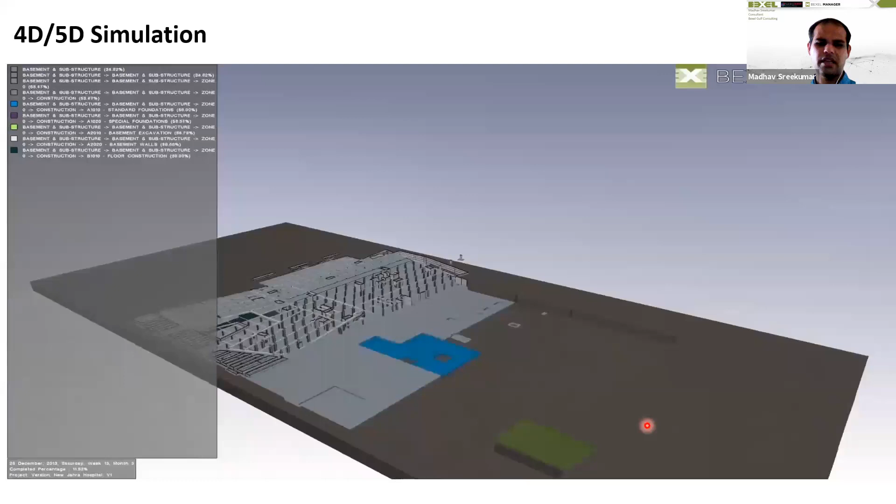Finally, this is an actual 4D, 5D simulation done using our software for a hospital project that has been recently constructed. And you can see what you see. What I see is that in a sequential manner, we generate an intelligent schedule. If somewhere our logic fails to correctly capture the information, if a construction error is made, that can be very easily captured using such graphical data.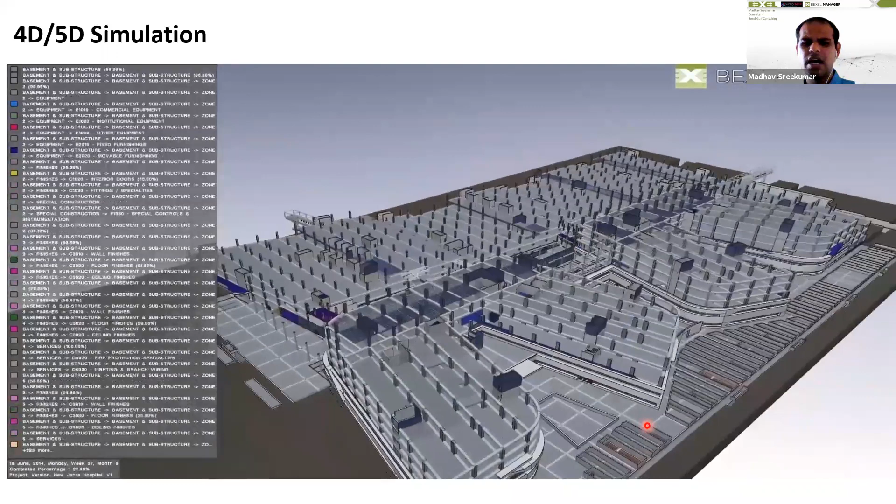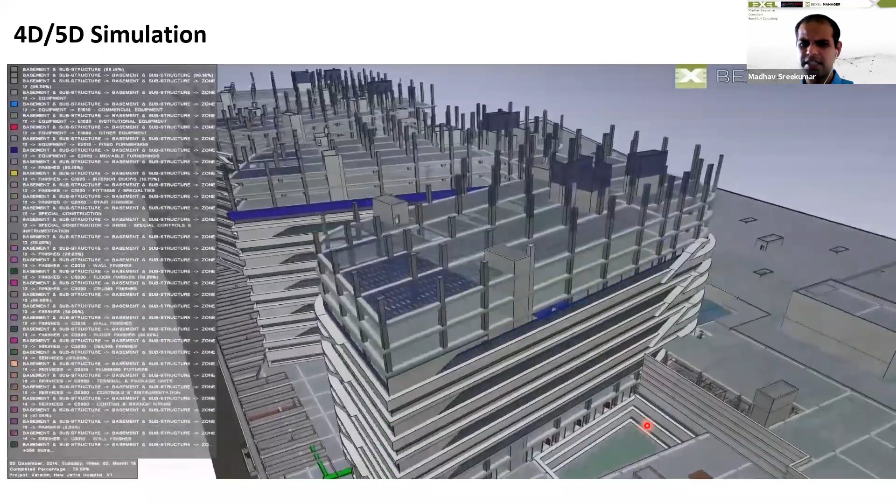And that is essentially what we do using such simulations, other than the very quick and aesthetic part of it. This data is automatically generated when we set the rules using the zone and the methodologies. And such kind of information can be customizable and even sent to very good softwares that handle such kind of simulations, such as Unreal Engine. So that kind of communication is also possible using our software. So this is something else that we are really good at handling.

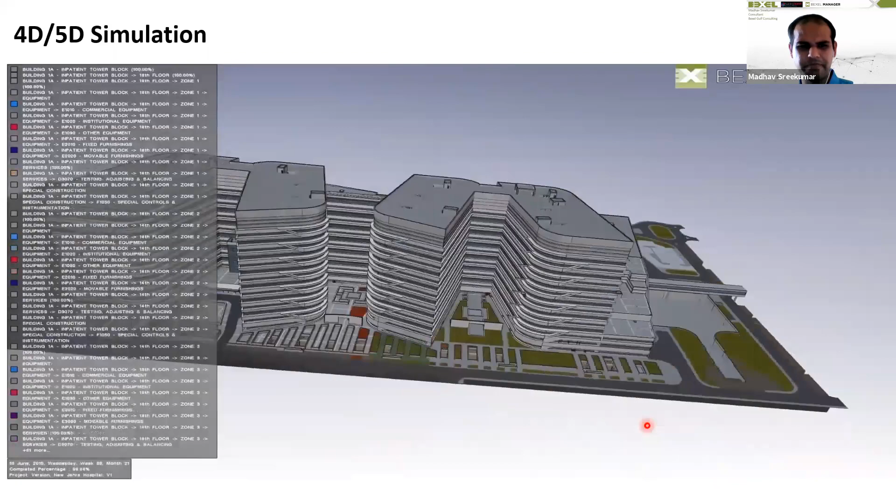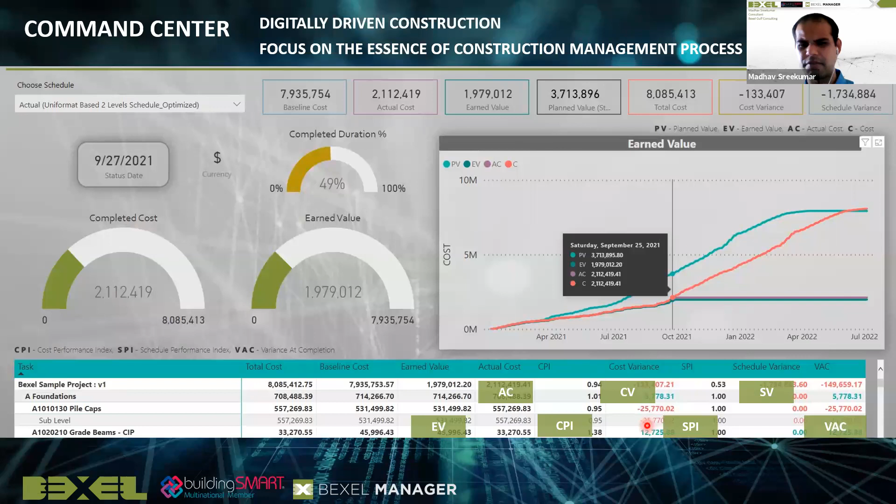And finally, the facilities maintenance part. I would like to skip this part because I feel that there is an overburden of information from our end, and you would also like to take time to process the information that we have shared until now. So these are some of the informations that I would like to skip through, because it's already been talked about.

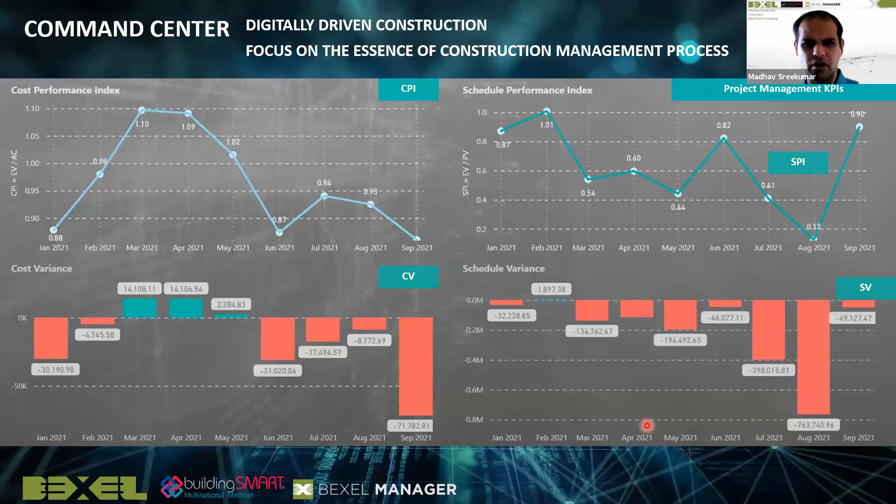Finally, I would like to conclude that when we first approached the TKM College team, Dean Professor Seema Madam told us in the first go, I don't want you to sell your product to my students. I want you to understand what they would benefit from and what they can gain. They should gain something from this rather than understanding all the glories of Bexel Manager.

So from that perspective, we would like to conclude by saying that with Bexel Manager, when we are talking about the next generation of digital construction, we are talking about automatic updates of all the analysis, change management that is very easily doable, disruption analysis with different scenarios, all handled using our software, and archiving all the versions of one particular project.

When you are entering the construction industry, the changes are very dynamic. The client requirements would change, the structural detailing requirements might change. So keeping track of all the versions and how the changes are impacting the schedule and cost is very much possible with our software. Then updating of the schedule and optimization of the workflow and cost is very easily handled. These are some of the high impact things that result in a high return of investment when using Bexel Manager to manage the digital data.